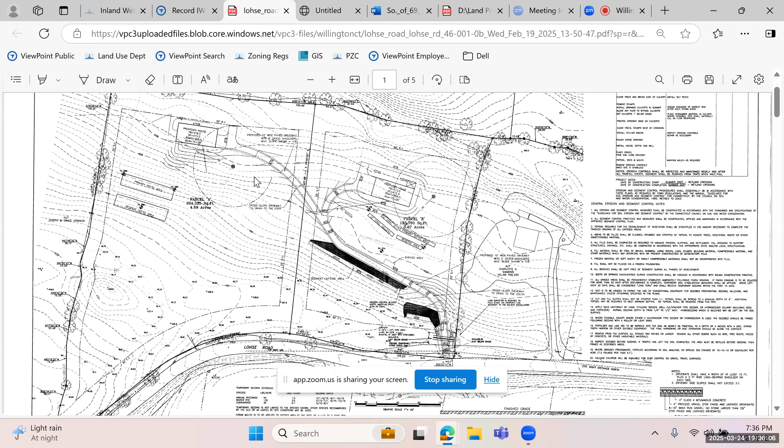So on this plan, Lohse Road is at the bottom of the page, generally parallel to the bottom of the page. North is to the right as you look at this map. There's a wetland delineation for a wetland system that runs generally parallel to Lohse Road. That is, following my cursor, generally in this location. And then again, the opposite side, the westerly side, is over here.

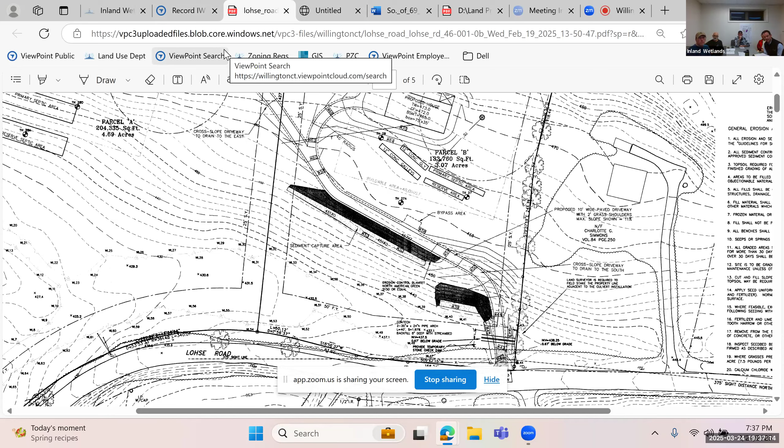So we are proposing a common driveway coming in along the north end of our frontage. When we started this in 2006, we had two driveways, one for each lot. It was felt it was best to combine them. So we're staying with that methodology to have a single 10-foot wide common driveway crossing the wetlands at that north end of our frontage. I got you. Oh, that's even better. So the wetland boundary is shown there in blue. And the topography on the site generally drains towards Lohse Road from the rear of the property to the front, west to east. And then the water course drains from north to south, right to left on this plan.

So there's going to be 2,120 square feet of wetland disturbance. We're proposing 2 culverts to convey the flow for 50-year storm frequency and constructing a driveway and utilities over that crossing. After that, we'll be climbing the hill with the common driveway to serve one house and septic system on each property. There will be approximately 88,000 square feet of disturbance in the 250-foot upland review area. We have sedimentation erosion control shown on plan view and in detail.

We have erosion control blankets on the side slope of the driveway at the wetland crossing, an anti-tracking pad at the construction entrance, a temporary check dam down gradient at the proposed crossing, and a number of sediment traps on the low side of the driveway where we're encouraging sheet flow to shed runoff from the front yards and also from the driveway into these sediment traps to capture sediment both during site construction and permanently once the houses are constructed.

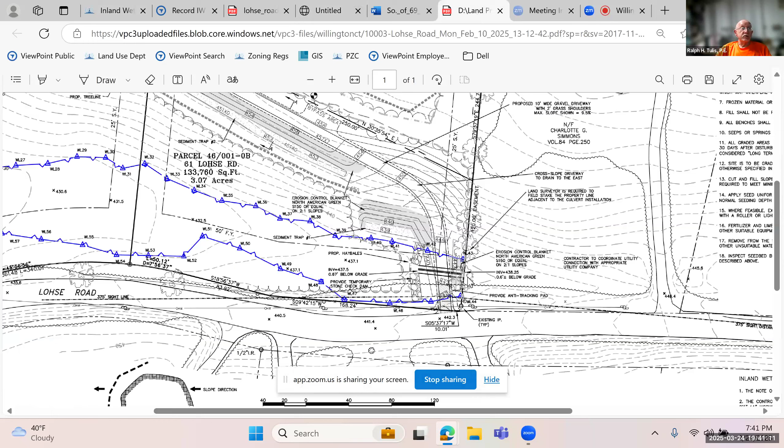But that aside, I have concerns that the elevation of the driveway where it crosses the stream is essentially the same as the elevation of Lohse Road. We have a double culvert, which I like to see. It's certainly substantial in cross section. But as with any watercourse crossing, maintenance of that culvert is essential. It doesn't take much to block the flow. Debris and a few branches coming downstream can block both culverts completely.

And if there isn't someone paying attention, that has the potential, particularly with some of the extreme storms we've been having, to cause flooding of Lohse Road. You're at an elevation of 442 in that vicinity for the driveway, and Lohse Road's at 442.3. 0.3 isn't much of a safety margin. So I have concerns about the obligation to maintain that culvert by the property owner after construction is complete. And given that the head wall is essentially on the property line, do we get into issues with maintenance access that may involve the neighbor's property?

That's a concern. Moving on to the driveway itself, whether a common driveway is in compliance with zoning regulations remains to be seen. But my concern is runoff on a 9.5% slope of a gravel driveway. It is not going to continue to perform with sheet flow across the driveway. That driveway will get rutted from vehicle traffic. There will be two low spots going up that driveway that will channel the water parallel to and downhill of the driveway, and it's going to wind up at the very bottom. You can plan on sheet flow, but with a gravel driveway you're not going to maintain it. I would much rather see this driveway paved. The 9.5% is just 0.5% under the 10% that triggers a paved driveway.

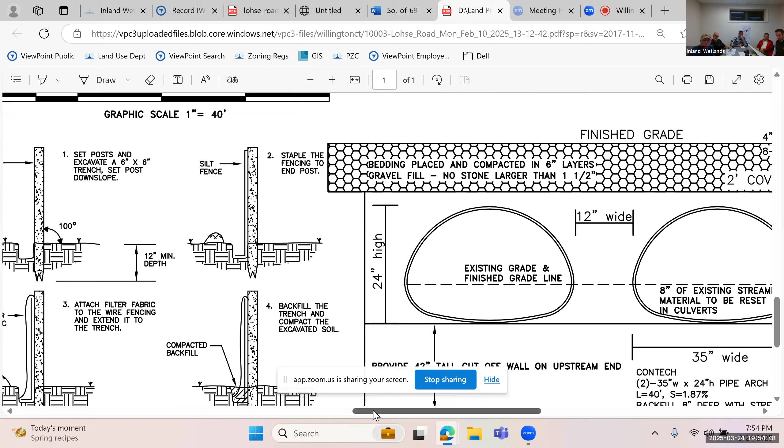That was my biggest observation: how wide is that stream when we were looking at it today? It has been raining quite a bit, so it did have some good flow. Was it like 3 feet, something like that? If you place those on either side, you're going to be widening that stream even wider, that's 35. So now you're, what's that, 70, 82 inches? So you're widening that stream pretty far. So that was my only question. If you're placing those on either side, you're going to have flow hitting that front head wall, and what's that going to be constructed out of?

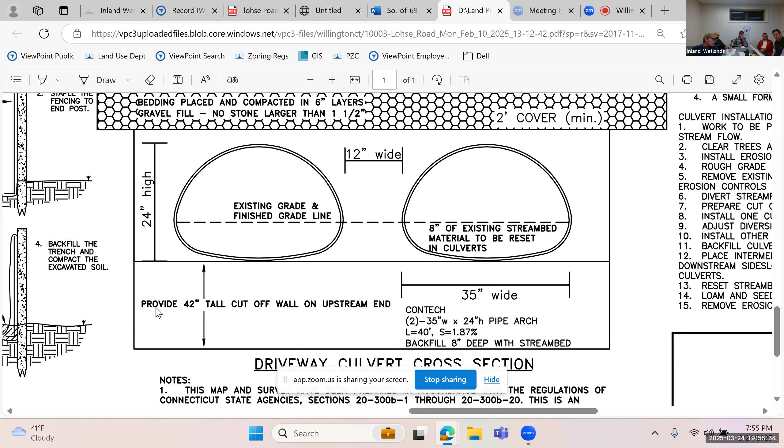So I'd be happy to slide the culvert so one of them aligns with the current width of the stream bed, and same with the outlet end, to allow that steady flow to continue on its natural course as it does today. Yeah, I'm just presenting that to you as one of my observations and concerns. I'm not the engineer, so I would just see that stream getting widened in that area, which I don't know if that would reduce the water level or anything. Trying to keep the water level the same. That's why we're setting that pipe low, so the stream bed is the same. That's all I really have.

Mr. Dromney, any questions of the applicant? I think we've covered just about everything. Okay. So would that mean they'd have to come back with new drawings? If you have something specific that you're looking for, then you could tell them what to do and they would revise the plan accordingly. If you aren't sure and you want them to look at it and come back, then they would have to. So it depends on what you're contemplating. I mean, these have been engineered, went to our engineer, they came back with questions, they adjusted. So those were only my observations.

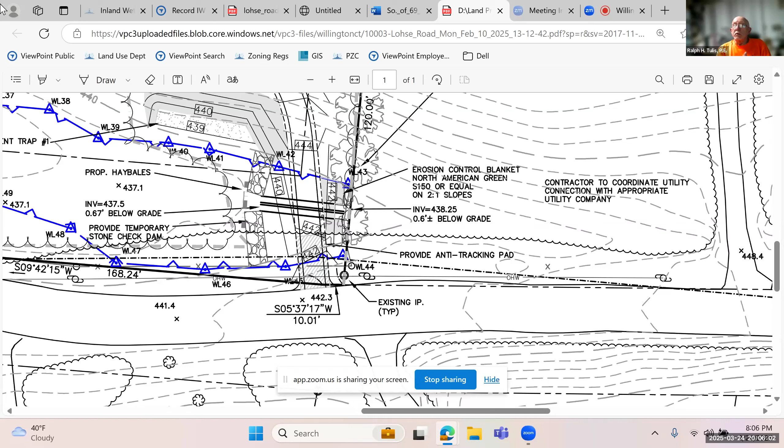Mr. Chairman, could I pipe up here, if you don't mind? I don't think I've been nominated the chairman. I'm just commissioner. You're the chairman. I'm acting. FYI. Acting chairperson, how's that?

Anyway, Ralph. I like the idea of a 3-sided box culvert over adding a third pipe. I think pipes are going to get plugged. If we had a relatively broad span for a 3-sided box culvert, then you really don't have to dig in the channel to install anything. You can do it on either side. You can get a footing in the ground either side of the water course, land the culvert, backfill it up to the culvert, and you're done. And you're not working in the mud, and you're not subject to the whims of Mother Nature.

That's just my observation and my sentiments looking at this from an engineer's perspective, as well as from a lifelong resident's perspective. This is not a major water course. It can be a major water course in extreme rains, but if you're going to put in two pipes, you should have one lower than the other anyway, so that your low flow is maintained in one pipe. The drawback to that is stuff starts to accumulate in the unused pipe in low flow situations, and critters have a way of utilizing that for their home. It can become a problem down the road.

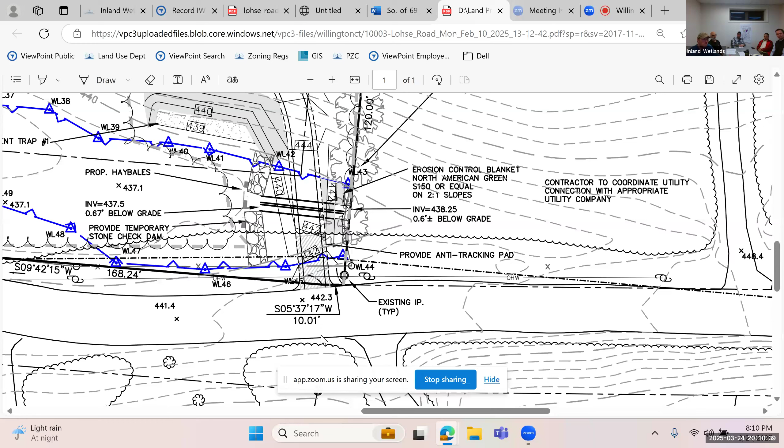So it's just a matter of where you fall on those last two items. Well, let's talk to the applicant and engineer. What do you think about all those things? You know, we discussed a box culvert, obviously, that would be a better crossing than the culvert. The paving of the driveway. And on the site walk, the sediment trap, you said those were going to be vegetated, or seeded. And I think those are probably most important during construction. Yeah, but we'll keep them there.

I'm just thinking because the culvert upstream is so much less than what we're putting in here, including the third pipe, I don't necessarily have a problem with that design. Okay. You know, it's a relatively short distance from that other culvert to this. That's true. If anything's going to clog, it's going to be that one.

What's that? The face like this? How's that going to be constructed in material? Is that going to be water hardy, like be able to take some velocity and flow? I'm proposing an erosion control blanket there, which has a steep slope, so it doesn't have to be mowed. So it's going to be a vegetated slope. So that's the north side, coming down from here to there.

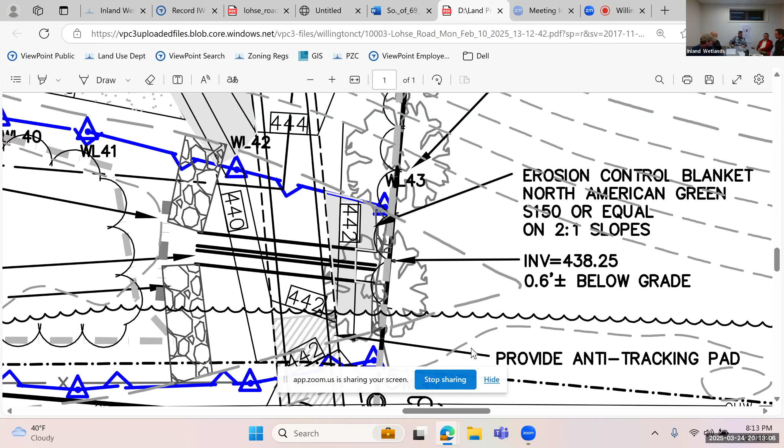And do you have anything with the paving or gravel? What's your take on all that? Well, it was our preference to have it gravel, that's as we proposed. Yeah, I was hoping to keep it gravel only because going that 600 feet distance for the houses, that's some serious cash for that asphalt. I think I'm probably around $60,000 just in asphalt, and that's if I prep everything myself and then have a paving company come in. That was the ballpark I got when I first started this.

I love asphalt; it's the best way to go, but it's such a huge cost. That's my only scare. I mean, we can't force you to do asphalt. So it makes sense to consider some pavers at the very end near the crossing to firm that up. It's not paved, but it's a whole lot better than gravel. I'm not proposing the entire driveway, but maybe the last 50 feet or something. I was just going to ask if he's more concerned about the tire tracks coming down towards the culvert, right? Right. So maybe the first 50 feet or something paved, that way nothing can erode there.

Well, I hate millings. You know what happens with the millings? The first time somebody plows, that's all going to be in the river, it's going to be junk. I don't want to do that either. I'd actually rather do the asphalt the first 50 feet in or something from the road over to the culvert, for a certain distance, wherever you think it makes sense.

It will certainly stabilize the whole thing if it does go over the top. Yeah, it sure would. Because if it's dirt or gravel, it's just going to take it all away. I think you're talking just in this area in here, past the wetland on the west side. Yeah, that makes sense. It would actually lock everything right in. And that could give them better traction to get up and go and come down and make that turn.

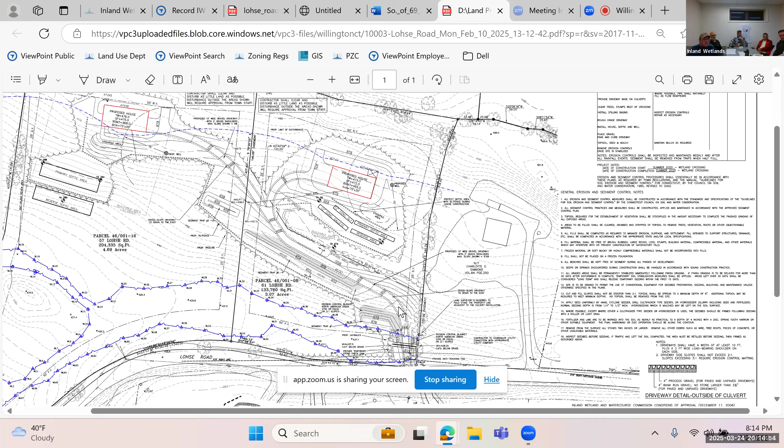Couldn't you cut the driveway in a little bit so that it was pitching in, sort of uphill, so there was a bit of a cross slope on the driveway, so the water would not want to shoot down? Like a gutter type thing on the side of the driveway? No, not so much a gutter, because you still want the sheet flow, but just have a slight slope to it, pitch down. Zoom in. Yeah, he's got a cross slope on the drive. Correct. That's what you're proposing.

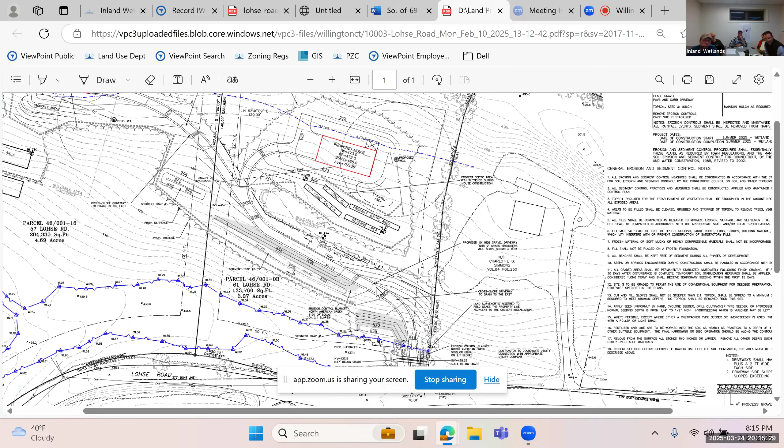I'm trying to have a slight cross slope on the driveway to drain to the east. Those 454 in the rectangle is not exactly perpendicular to the driveway. I'm trying to show a cross slope. You've got 458 there, 456. Yeah, I get that.

Oh, I see. The shaded area? Yeah, then that will direct stuff into this basin here. Correct. Oh, I understand. What is that? Is that rock? No, that's a blanket, the shaded area. Oh, that's a blanket? The erosion control. Oh, okay.

So if he paves through this piece, to the 444 contour with the box around it, just past the wetlands, that gets us 2 feet above the elevation of the driveway, back towards the road. Mhm. I see. Does that change your grading at all if you do pave that? Not really, so you're adding a couple of inches, 2, 3 inches. Yeah, it'd be like 3 inches compared to the 2.5 probably, right? So that's okay.

You comfortable with that, Matt? Yeah, I mean, maybe it makes sense. I would like to maybe do that. It locks everything in there, and it's pretty much a guarantee that it's not gonna erode away if flow ever did go over the top to that proposed 444. Right, if it was gravel, it would just be swept away. It'd be downriver, downstream.

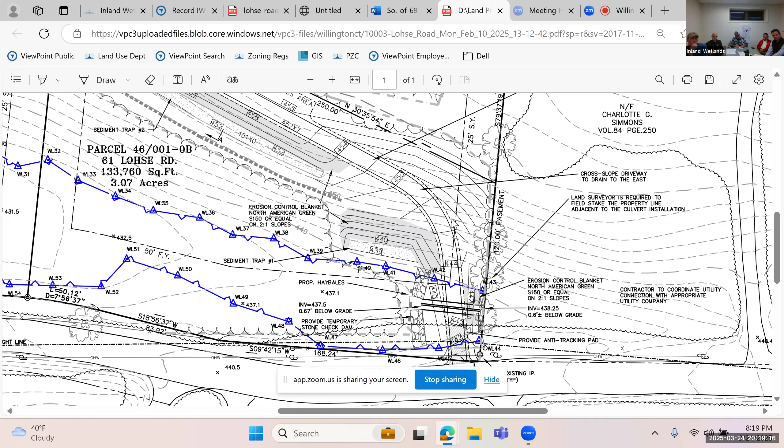All right, so those modifications will be in the conditions, or do we have to read them off? Well, you should at least make sure that all four of you have consensus on what they are. So we've talked about making the maintenance requirements be referenced in the deed, adding the spot elevation per the town engineer's comments, paving from Lohse to the 444 contour shown on the driveway, and adding a third bypass pipe of 12 inches minimum. If those are the conditions you're comfortable with, you can incorporate them into a potential motion. I will stop sharing so you can see them.

So Evan and Ralph, were you able to hear those conditions? Yes, I did hear them. I don't fully agree with them. Would you like to have a discussion? Like I said, I think the driveway should be paved, the common portion. I honestly like the three-sided box culvert over piping. You can get a wider water channel underneath the driveway. You don't have the vertical restrictions that the piping introduces, and you have less chance of obstructions from Mother Nature, be it branches or debris flowing downstream.

I don't know where the road leak-offs are into this wetland. That may or may not contribute to a problem. But I don't agree with putting 3 pipes in there. I think that's silly. Well, they won't be all together. It'd be 2 and 1 side. I understand that. I would really like to see the elevation of the driveway pavement at least a foot below Lohse Road, but I don't know if that's achievable as depicted currently. That way, if there is an extreme event, the water can flow over the driveway but not out onto Lohse Road.